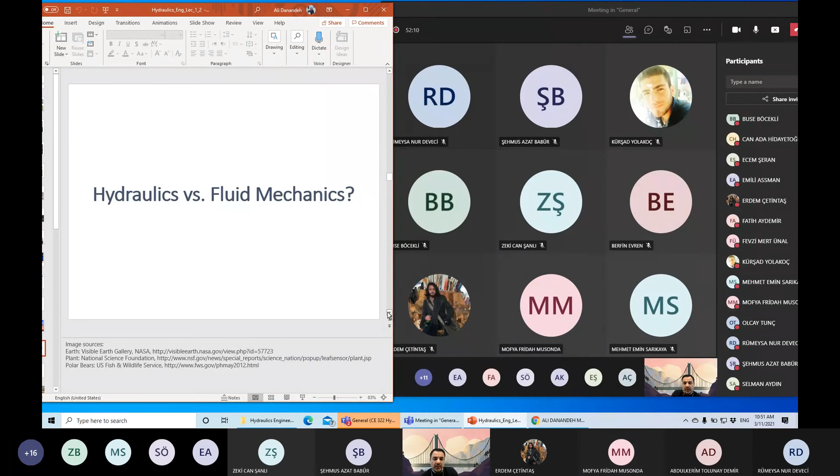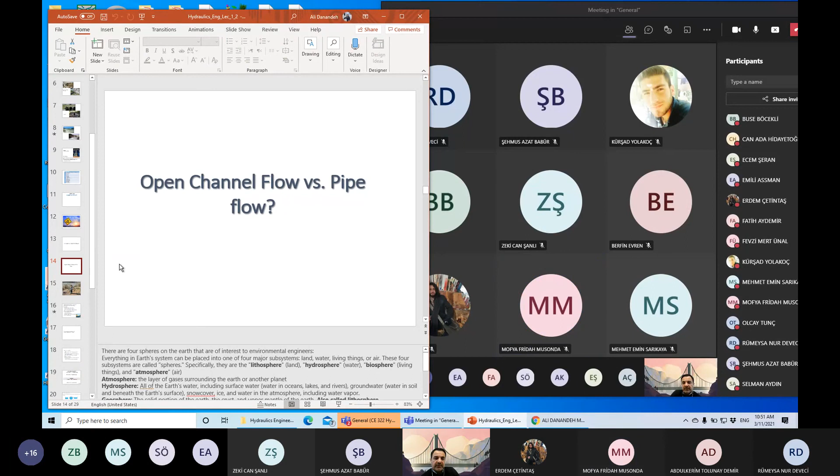So if you forgot what we studied, let me see, I am here. So actually, one other name for hydraulics engineering is open channel flow. You can find so many books with this title, Open Channel Flow, which is another name for hydraulics engineering. And the difference between hydraulics engineering and fluid mechanics is a difference between open channel flow and pipe flow.

In fluid mechanics, we mostly talked about fluid motion through a pipeline. You remember we were talking about Bernoulli equation, energy losses in pipeline, and the most important characteristics were velocity, pressure, and the z term. You remember, the distance or height of a point in a streamline from our datum.

But in open channel flow, as it's clear from the name, an open channel is a channel with open condition. There is no closed conduit. It means that water is in touch with atmospheric pressure. Therefore, the pressure term is not important in open channel flow in hydraulic engineering.

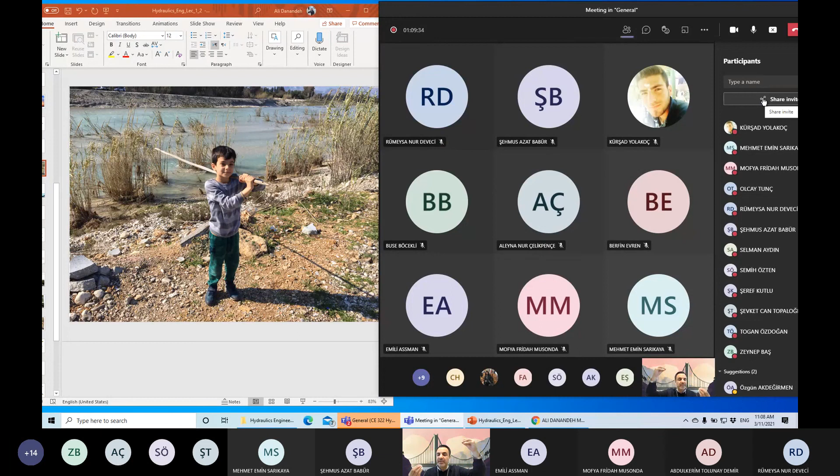Therefore, we can say the third difference is the source of energy. In pipelines, the source of energy is more or less a pump or a reservoir, but in natural channels, in open channels, our source of energy is gravity. Water moves as a result of gravity, or as Mehmet Emin said, as a result of difference in elevation between two points; it moves from upper elevation to lower elevation. It is slope or gravity. So we can conclude that we have three main differences.

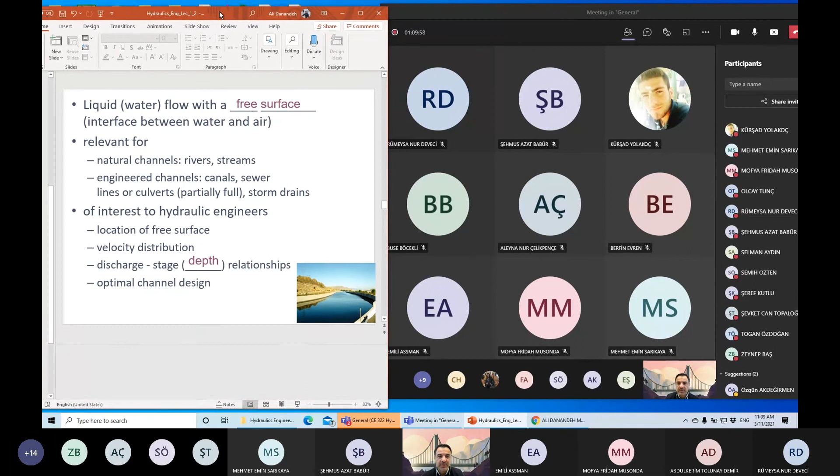You can also make a note. By the way, your friend started recording this session. You can come back to watch this lecture again and memorize those three differences, which are important in my mind.

One other thing, please never start recording without my permission. If you do it again, you will definitely have some problem with me. You might remember my students last year did it, and I completely left the online teaching. I can do it. I can provide some links, some PDF files like other instructors, so please never repeat such action. I would like to ask a question actually, but the answer is given.

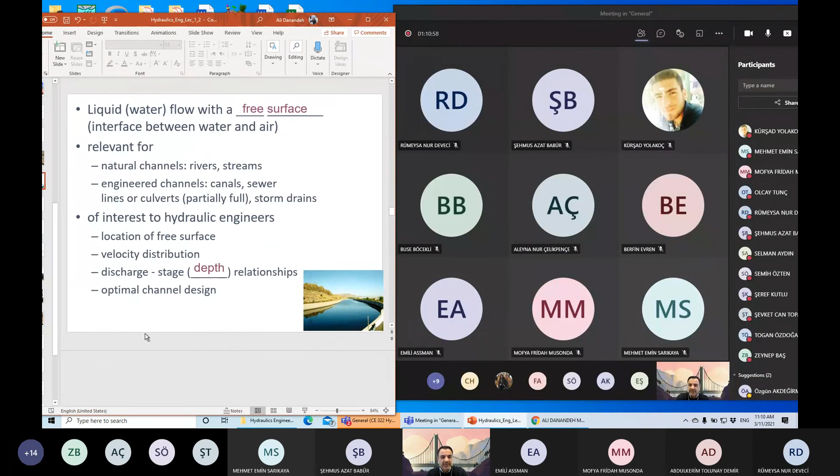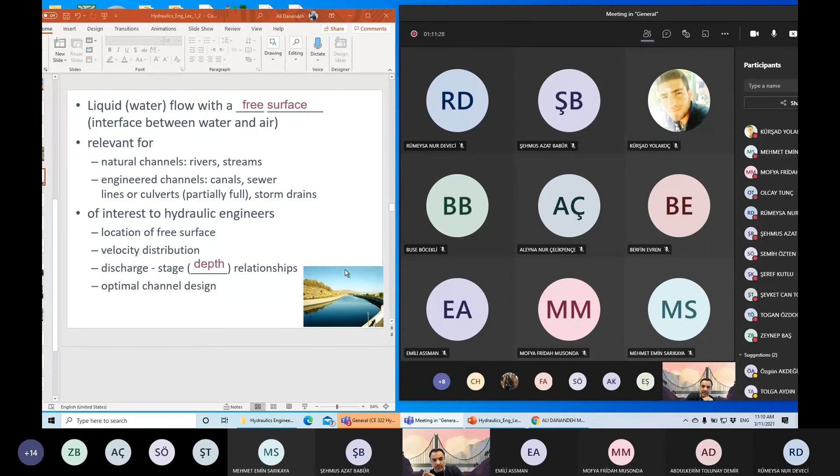Let's continue from here. Liquid or water flow with a free surface. What does it mean? It means that the water surface is in contact with atmospheric pressure. We talked about it. The interface between water and air is called the water free surface or water surface. Remember, free surface means the surface of water which is in contact with atmospheric pressure.

It means that hydraulics engineering deals with or talks about natural channels like rivers and streams. Okay, I talked about it. Engineered channels like canals, sewers. This is a canal, you see, in order to transfer water for irrigation purposes or even for industrial water supply, for drinking water supply. We built some canals between the dam and the end user. For example, it can be a water treatment plant or an agricultural area.

Then engineered canals, man-made canals, and sewers. What is a sewer? A sewer is a small or narrow canal we have mostly in urban areas in order to collect storm water and drain storm water from cities to the water disposal system or to another river, a bigger channel. And this is engineered channels. And sewer lines or culverts.

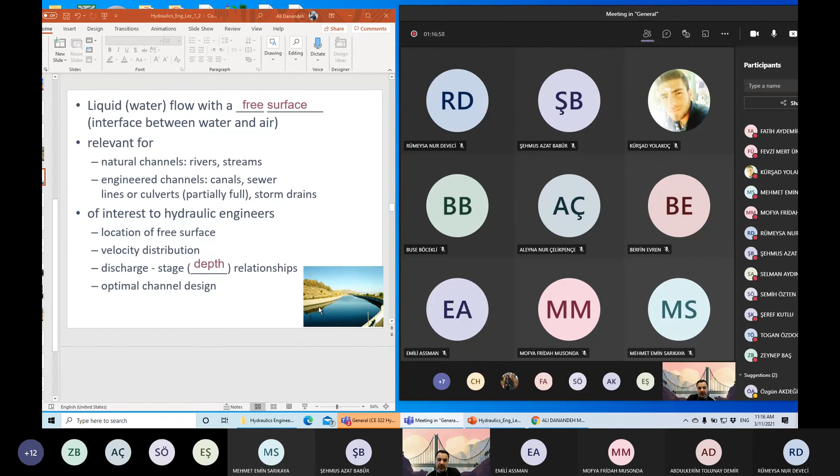So optimal design is something that you deal with as a hydraulic engineer. Which shape is optimal? Which dimensions? Which slope? Everything should be optimized in order to minimize cost of construction. Optimization is a general word. Optimization of the shape, which results in minimizing the cost. Okay. Any questions so far? No.

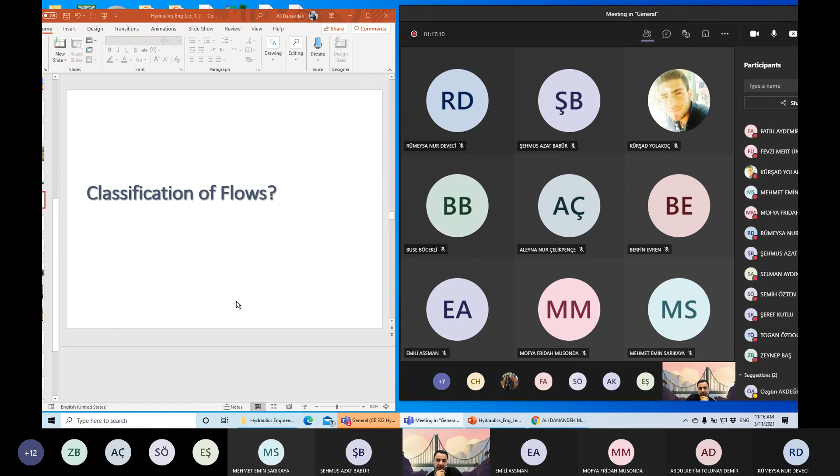So the classification of flow is the other important thing that is the main material for our next lecture, lecture 2 that we are going to have today. This is only a brief review. Let's only read it, and I explain after a break. Steady and unsteady flow, let's give only the name. When we are dealing with flowing water, there are different patterns with respect to time or with respect to space. By considering these patterns, we divide flow into different categories. One of them is steady and unsteady.

What is a steady flow? Steady means something constant, yeah? Steady, stable, constant. When we say the flow is steady, it means that as time passes, in a given section, flow characteristics such as discharge, velocity, depth remain constant. No variation, no change in those characteristics with time. For example, you are looking at a river section, and assume that you are measuring the velocity.